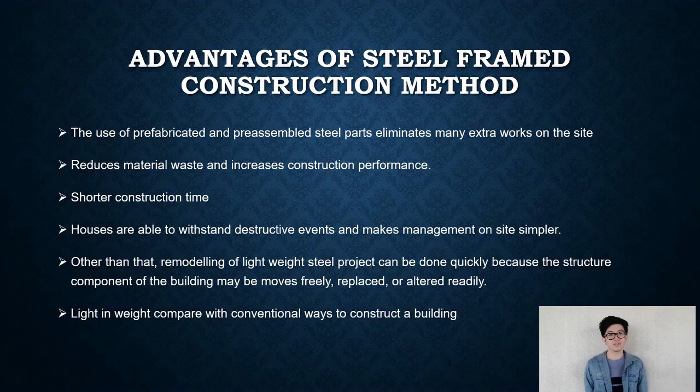So by using steel frame construction, the houses are also able to withstand destructive events and make management on site simpler, since it eliminates many extra works on the site. Other than that, remodeling of lightweight steel projects can be done quickly because the structural components of the building may be moved freely and can be replaced or altered readily. And last but not least, it is light in weight compared with conventional ways to construct a building. Next, I would like to show the plan view of our low-cost terrace house.

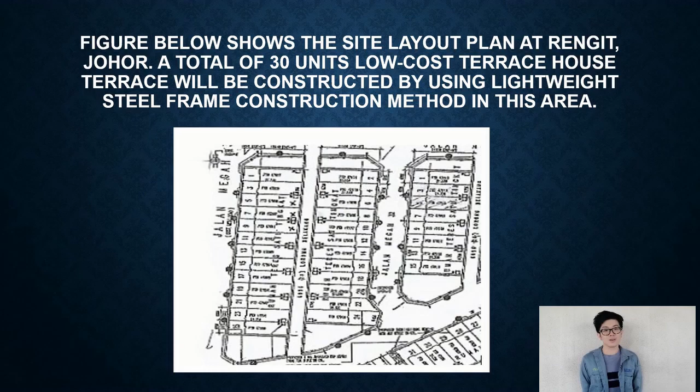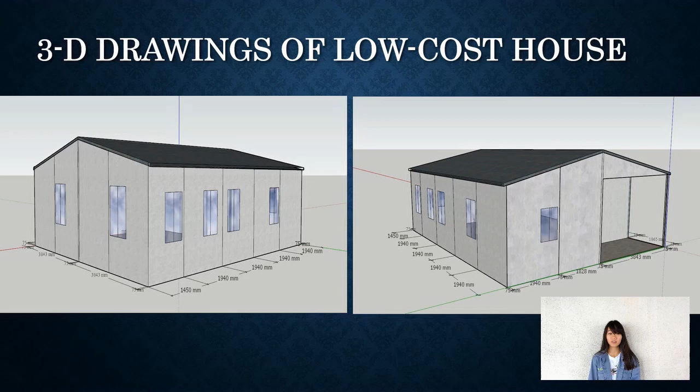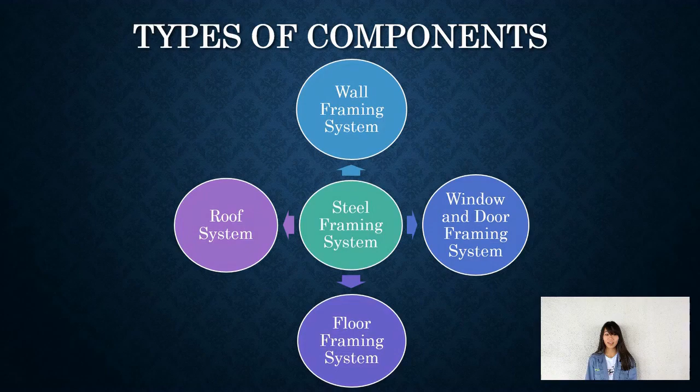Hi, my name is Violet Leng. Now I'm going to explain about structural components of lightweight steel framing system. The steel frame house is built on a reinforced concrete ground floor slab, and here is the 3D drawing of the low-cost steel frame house. 4 types of components are discussed, which are wall framing system, window and door framing, floor framing, and roof system. The steel stud framing is used as the load bearing system and acts as the support of the entire structure. Steel framing is fastened to the floor structure through the bottom plate after all panels have been correctly aligned. Next is the wall framing system.

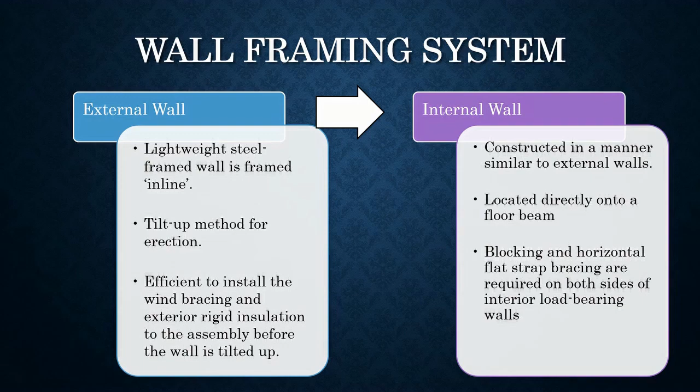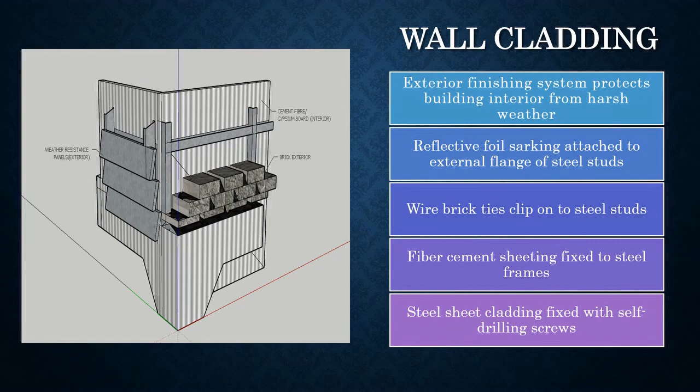For external wall, the lightweight steel frame wall is framed in line, so that the studs are directly on top of the joists. It uses tilt-up method for erection, so the walls are assembled on the floor and then tilted into the construction platform. For internal wall, it is similar to external wall and located directly onto the floor beam. Wall cladding is an exterior finishing system. It protects the building interior, provides thermal insulation, and improves interior acoustics. The wall cladding design is shown in the figure. The wire brick tie clips on the steel stud, and the fiber cement sheeting is fixed to the steel frame with self-embedding head screws. For window and door framing system, here is the detail of window head and window sill.

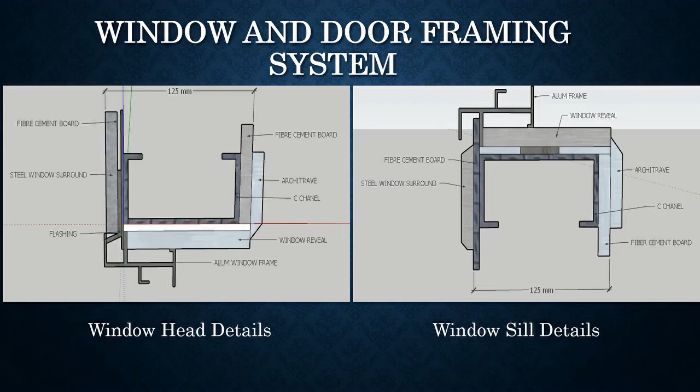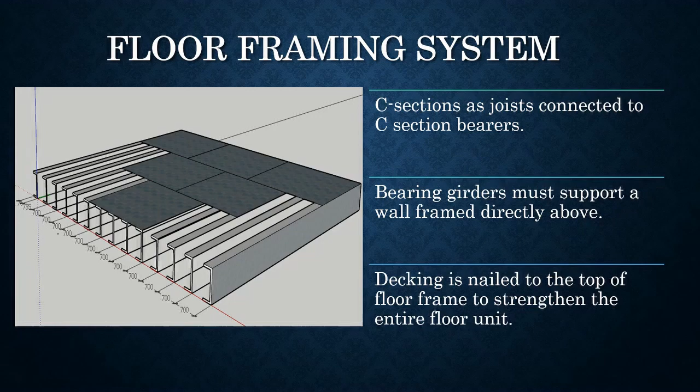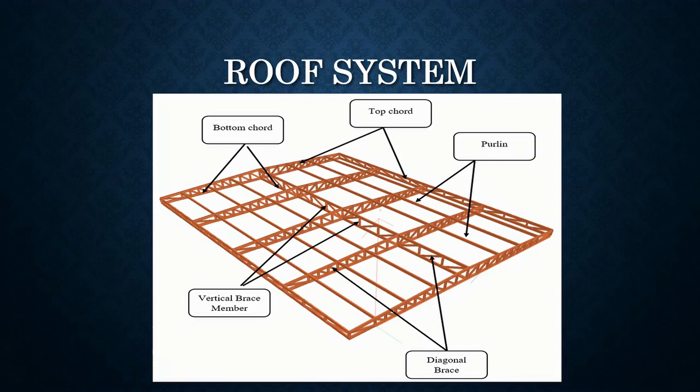A large opening must be framed into a wall. Several components used are the sill, jamb stud, frame, header, and lintel. Next is the flooring system. It is made out of C-section as joists connected to C-section bearers. The bearing girder supports a wall frame directly above, and the decking is nailed to the floor frame to strengthen the entire floor unit. Lastly is the roof system. It is a steel truss system and comprised of purlin, top and bottom chord, vertical and diagonal brace shown in the figure. The finished materials such as gypsum board are typically applied to the bottom chord of the truss.

In internal and external wall connection, top plate is used to carry truss load from the roof, supported by the bottom plate. Nogging is used in load-bearing walls to provide lateral restraint to the wall stud, and it is not needed for internal non-load-bearing walls. Bracing is needed in certain walls to provide resistance against wind load. The wall panels are usually connected together by mechanical fasteners such as self-drilling screws. For single wall construction, fiber cement sheeting and steel sheet cladding are fixed with self-drilling screws.

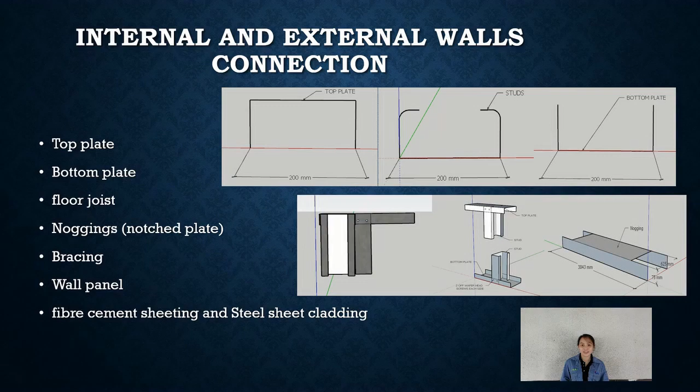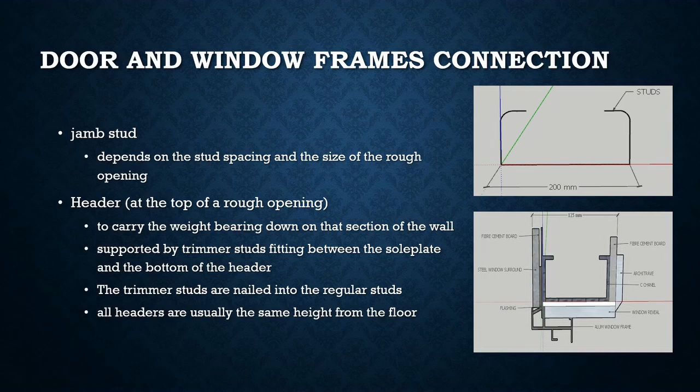Secondly, the main structural elements used in door and window frames are the jamb stud, window sills and heads, and lintels. The jamb stud depends on the stud spacing and the size of the rough opening. A header is placed at the top of a rough opening to carry the weight of the wall. It is supported by trimmer studs fitting between the sole plate and the bottom of the header. The trimmer studs are nailed into the regular stud using nails driven into the head of the header. All headers are usually the same height from the floor.

Window sill is added to the bottom of a rough window opening. The sill provides support for the finished window and frames. The distance between the sill and the header is determined by the dimensions at the top and bottom of the frame.